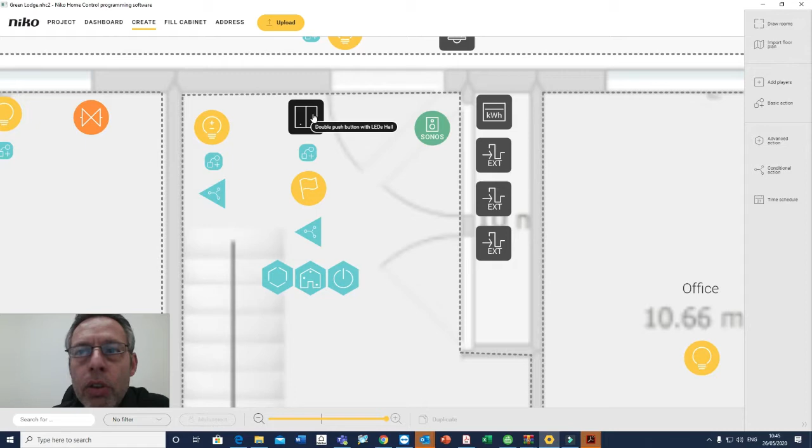Things like dimmable lighting circuits. If I just zoom in there, you can see there's a dimmable lighting circuit. There's a 2-button switch by the front door. There's a SONOS player already. There's a thermostat and heating and a dimmable light representing the downlighters. Each of these players represents the whole circuit, so that's the whole circuit of downlighters in the hall area.

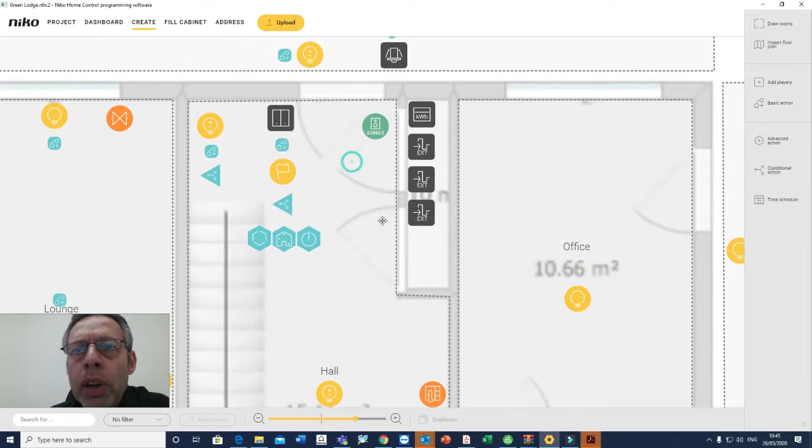Okay, so what I need to do is add a player in at the front door. So I'm going to select the front door and click Add Players. Now, because this is a push button doorbell, a traditional style doorbell that we're interfacing with Niko, we need to interface it. So what we're going to do is select a generic control and the push button interface as 4 buttons.

So if I just move that to near the front door - this is an interface which I've shown in a previous video on Facebook, where you can interface any push button, whether it's a weatherproof switch, a metal clad switch, or in this example, a doorbell, to interface with the Niko Home Control bus cabling.

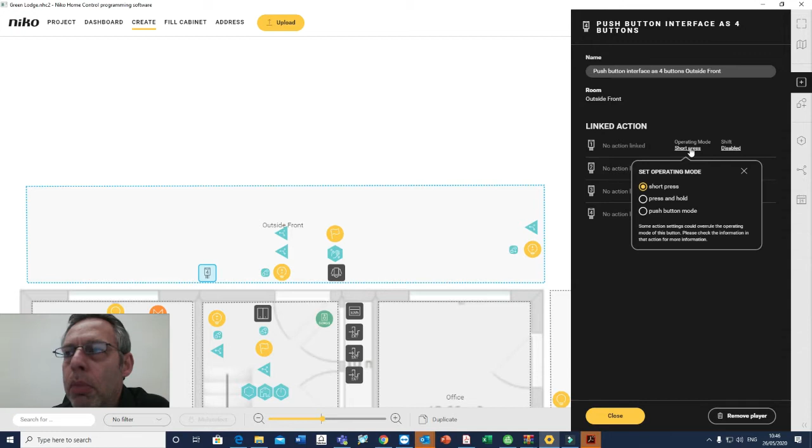So connection number 1 is the one we're concerned with. These all default to what we call short press. Short press means if you tap the button the first time, one thing happens; if you tap it again, another thing happens. But we need to change it to a push button mode. Okay, so the push button mode is the doorbell. That's the first thing we need to do.

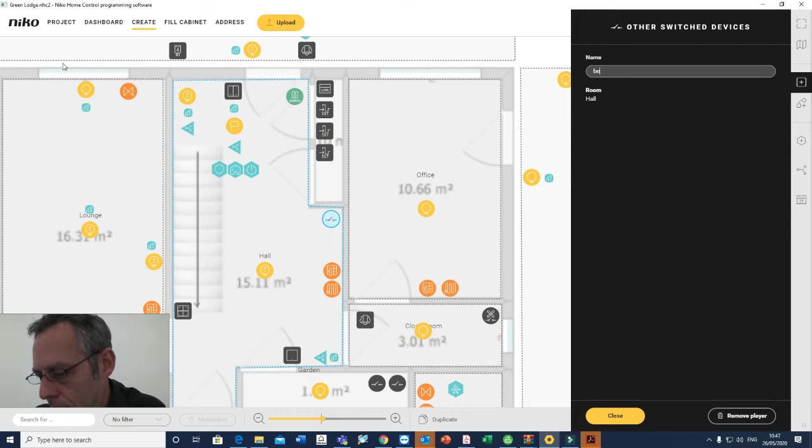Then what we can do is add another player, and we need to add an output now. So our output we'll add in the hall, and we can add an on-off output, which we'll call an other switched device. Now, this is going to be our chime, and this chime is connected back to our switching module. Okay, I'm just going to call this bell chime, and this is the bell chime in the location hall.

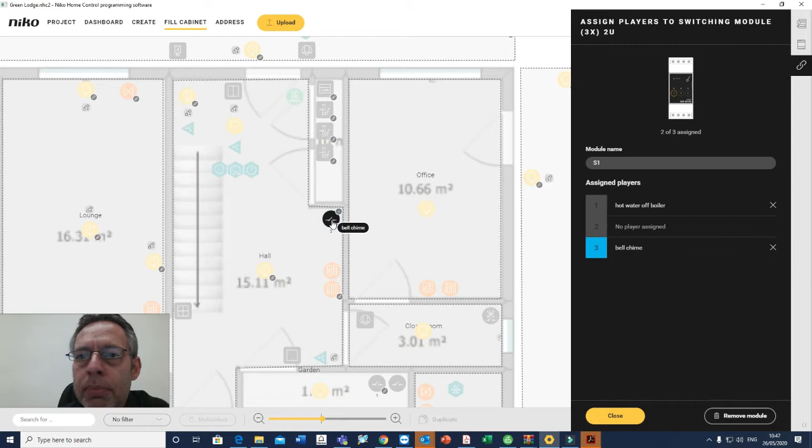So what we need to do before we go too much further into the programming is assign that to a module, and this is the module that the item is physically connected to. So if I click up the top on Fill Cabinets, then I know that if I select to view my modules, you'll see at the bottom here we've got switch module S1, and I know that I've connected this bell chime to output number 3. Okay, so I've physically connected it and told the software where it's connected to.

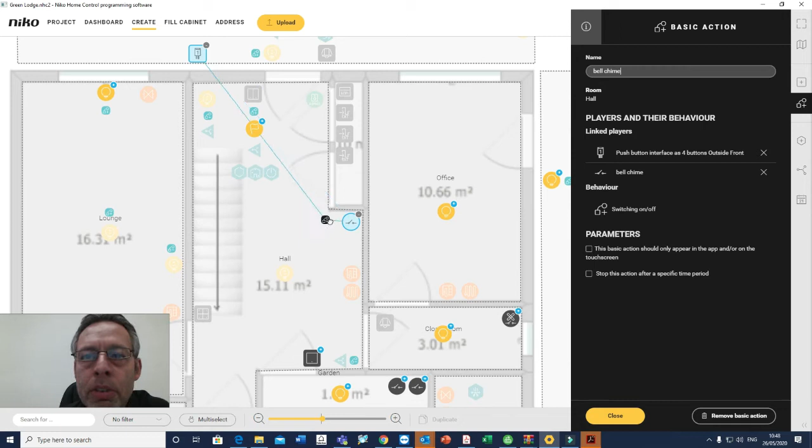So if we come back to create, what I need to do is make the bell chime sound when I press the button, and the way I do that is I select a basic action and I select the push button interface input number 1 and select my bell chime. Now, because I've selected this as a push button mode on that particular button, when I press the button, it's going to go bing. When I release the button, it's going to go bong.

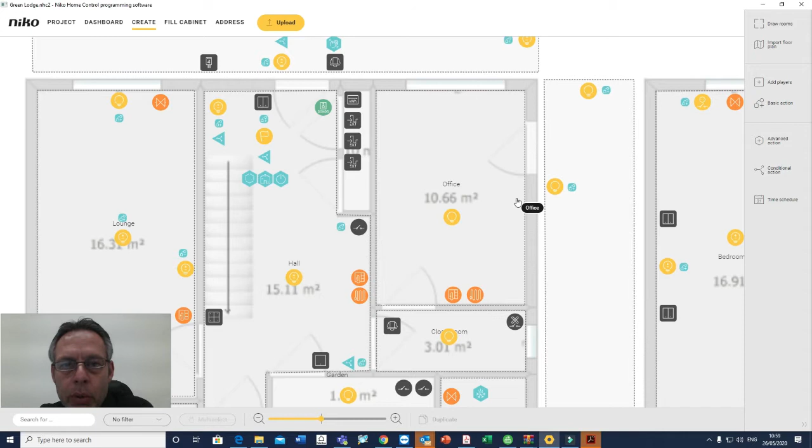Okay, so the functionality that I want to achieve here is that if I'm in the house, I just want the doorbell to go bing bong. If I'm not in the house though, I want the doorbell to go bing bong, I'd like the dog to bark through the speakers, and I'd like to get a message on my smartphone to say that someone's at the door. So I want that message to come through to me anywhere in the world. So the first thing I need to do is give it a time schedule.

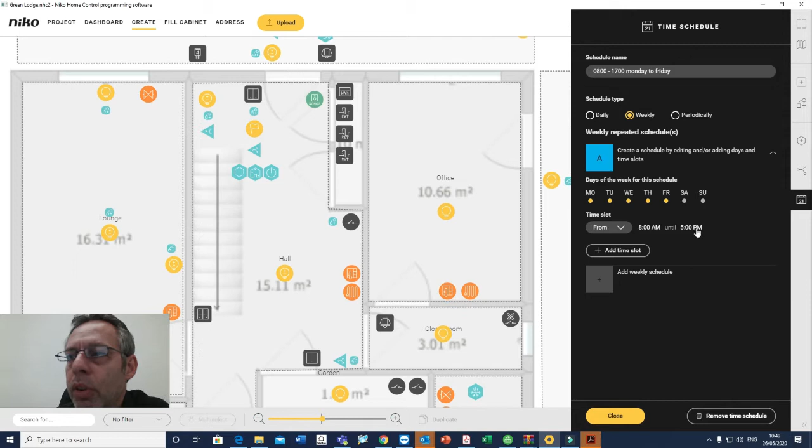I've got a number of time schedules in here already. I'm going to add a new schedule, and this schedule I'm going to call 0800 to 1700, Monday to Friday, so normal office hours. I'm going to select weekly, and say Monday, Tuesday, Wednesday, Thursday, Friday from 8 o'clock till 5 o'clock, 1700. So 8 till 5 on a Monday to Friday, normal working hours.

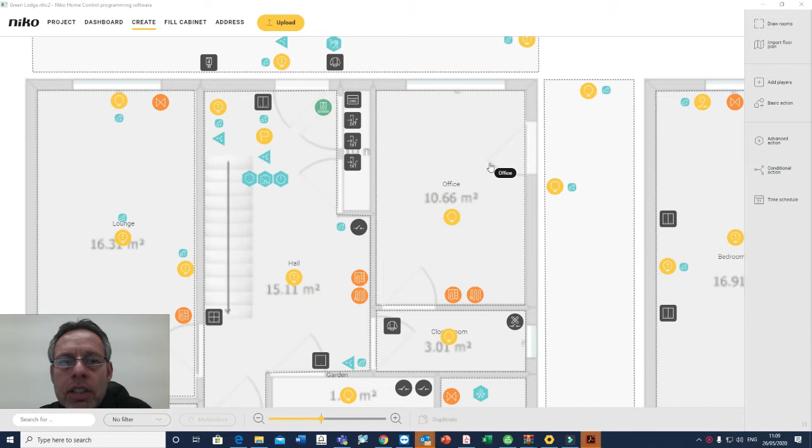Okay, so because we're integrating SONOS with Niko Home Control, we need to be able to select the track that we want to play, and the track is going to be the barking dog track, which we'll select from Spotify. Before we can actually do the action that makes all this work, we need to go into our SONOS app and add the barking dog track to my SONOS, in my favorites. I'm going to do that now.

So we select SONOS, then we select our track and we go into search. In the search bar we type barking dog. Now I'm using Spotify, and Spotify has got over 15 million tracks, so there's a barking dog sound effect, and I'm just going to add that to my SONOS, and it's added that track to my SONOS.

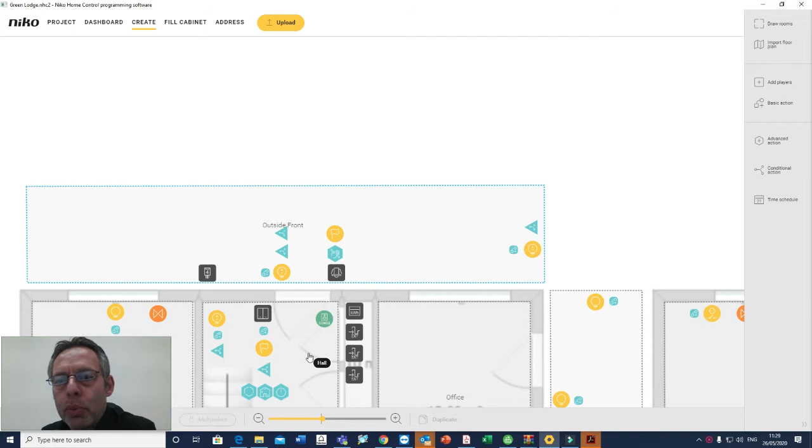Okay, so let's make all this work together now. We need to add a conditional action because we don't want this happening every time. We only want this particular operation to happen when we're not in the house. So we need to be able to differentiate between being in and being out. I've already pre-programmed an all-off action, performed by pressing the right-hand button of this wall control as we go out. When we press the right hand button, it performs an all-off function which turns all our lights off, turns all our speakers off, and turns our heating down, so it saves us energy.

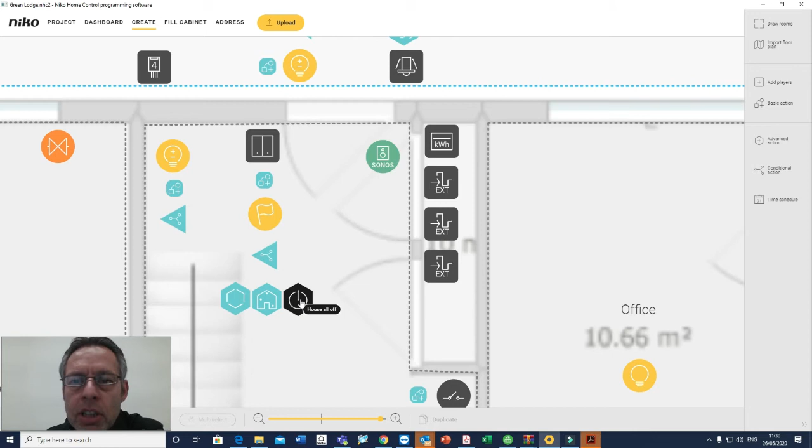Alternatively, we could do that by arming or disarming an alarm system that's integrated with Niko, there's a number of ways of doing that. And I add that conditional action, and I'll give it a name: notification and barking dog when not in, and doorbell press. So we give it a name that just means something.

So I want to say that if I'm out, all has been activated. So these are my conditional players. If I'm out and the chime is on, in other words the doorbell has gone bing, you need to first of all change it to an AND gate at the top. So it's if the house all off has been activated, and the chime has been activated as well, and it's within a time schedule of Monday to Friday 8 till 5.

Okay, so there's 3 conditional players here. First of all, I've got to be out. Second of all, the doorbell's got to be pressed. I want to select my SONOS player. I want to play, and my last, what I want to do is select, and there it is, barking dog. And that has pulled it from my SONOS playlist, my SONOS.

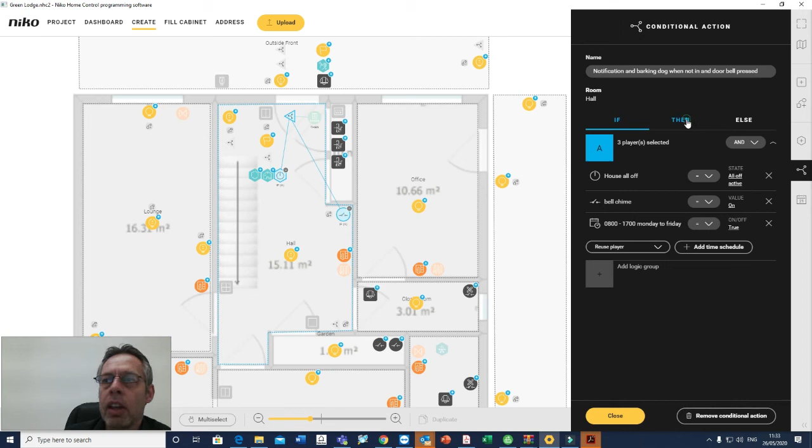Otherwise, do nothing. So just to reiterate, if it's Monday to Friday 8 till 5, then operate my barking dog track at 100% volume and then turn it off 20 seconds later and send me a push notification to say someone's at the door. Easy peasy.